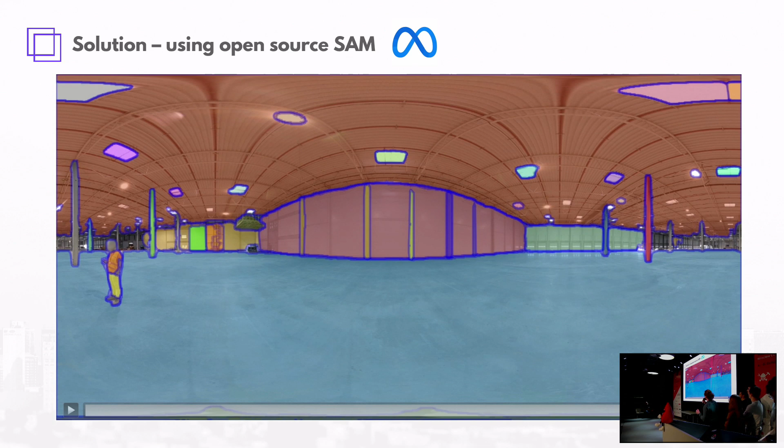So the first thing we found is that there is a web app where you can actually perform segmentation on an image, and we knew that this model would work for our case because we decided to focus on columns, and you can see that they're selected, and each region would then be used as a mask to compare with fake images. But how do we create a virtual 360?

As it is a key component to generate spherical images from the BIM model in the exact same position as the real spherical images, we tried different methods, and some of them didn't work. For example, we tried to load the IFC model into Blender and generate the spherical image there, but that didn't work because the geometry didn't show the way we expected. So we tried other methods.

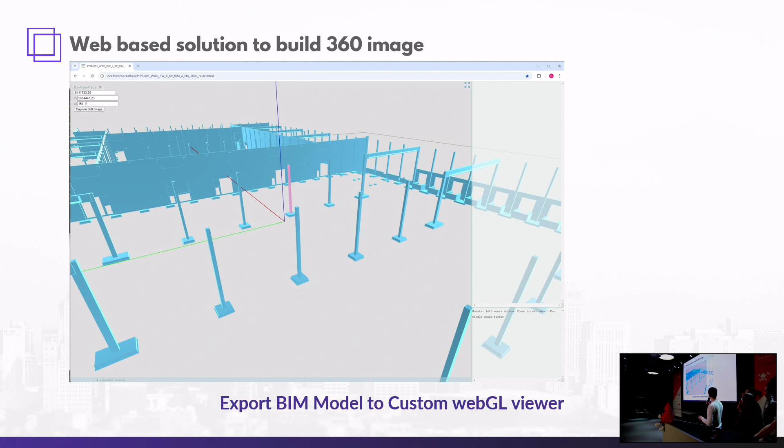We exported the IFC model to a WebGL model, took screenshots there and arranged them in a spherical image. That almost worked, but another method that actually worked was in Unreal. That's you again. Yeah, so that is quite a known workflow.

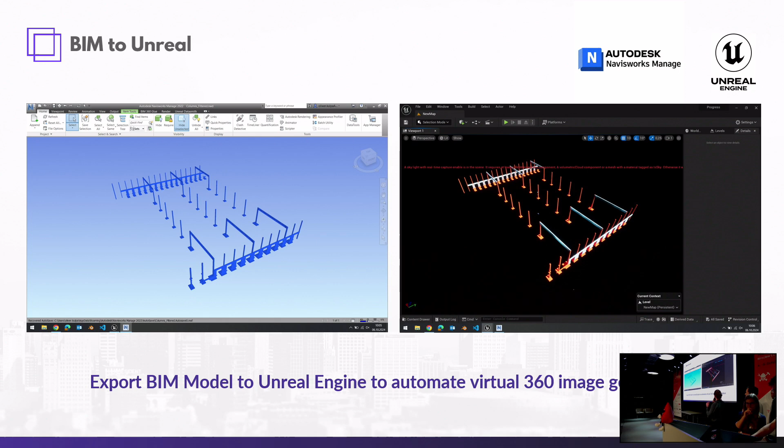We imported the IFC file, filtered, because it was quite big, into Navis, then from Navis we could bring it into Unreal Engine. That's a gaming industry solution, and it's known for automated ways of performing certain tasks. So we wanted to automate virtual 360 image generation based on the real panorama locations on the construction site. The goal was to reconstruct the real 360 image.

The virtual environment has the model data. Every column was then... can I ask for the next one? For every panorama, we focus on elements within a certain radius to minimize the search set. No, let's go back. Then we saved a series of images where every image represents the mask of a certain element, and the name contains the ID.

And when we had this, we tapped a bit more into the coding and got more into the AI models themselves. We compared the two types of masks: from the real images and from the images that were artificially created.

Then we used a Power BI dashboard to communicate what happens in the model, and we used IFC OpenShell to add a parameter to the IFC model that would tell us if the element we were looking for was built already or not.

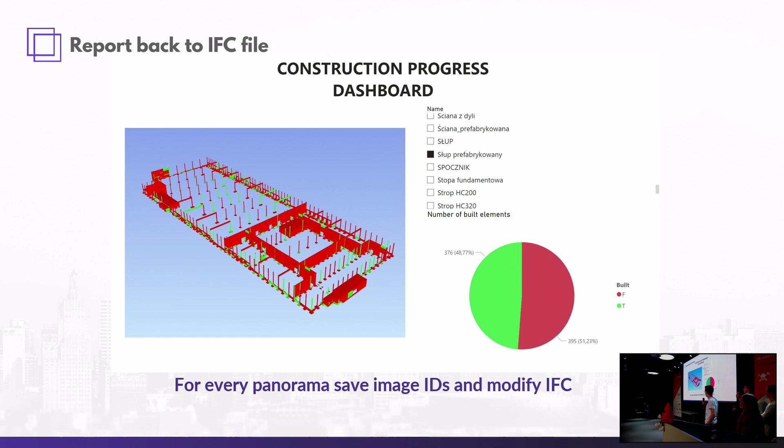So with the use of 360 segmented images, we were able to map those segmented images on a sphere and then check intersections of rays coming from the center of the lens. And therefore, we were able to compare the 3D IFC model with the segmented image.

So the second method is probably the simplest and the easiest, but not the most accurate. We used image classification instead of segmentation. And we only need two things for this, basically: still the 360 image, and the number of items that are within a certain radius of where the image was taken, which is a numerical value, so there is no comparison of masks of images or anything like that. All right?

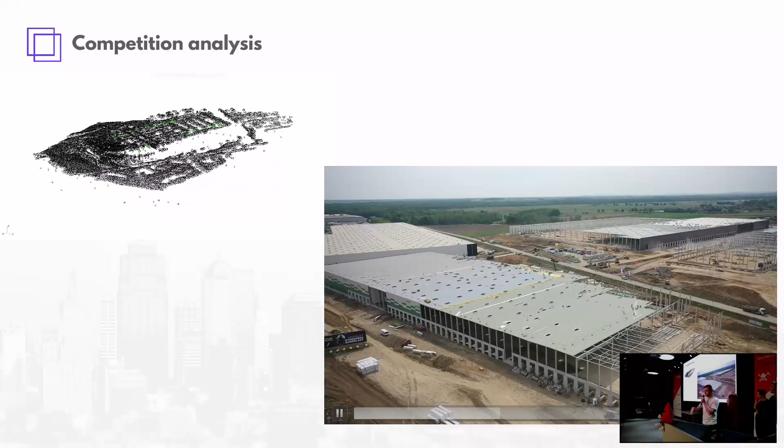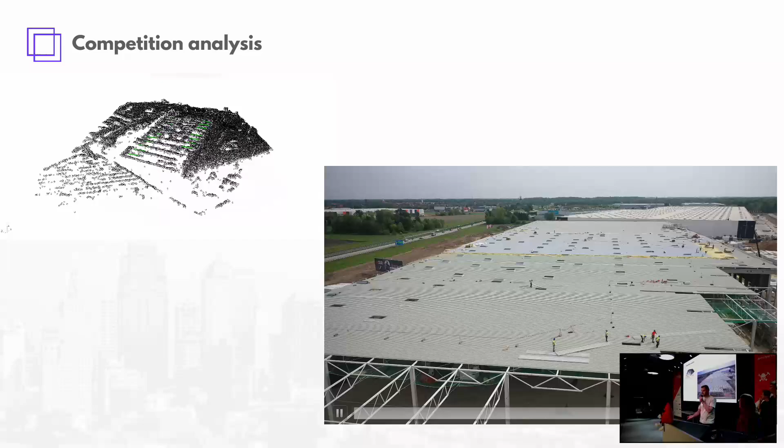But we also decided to check another approach, just to compare the data from the construction site and also from the BIM model in 3D. So we also had the video from a drone, which we could convert into point clouds. Having these point clouds geolocated, we were able to check: is this element from the BIM model, does it have points from the point cloud inside? If it does, it is constructed. If it doesn't, then it isn't. And we gave that information to the IFC model later. But the point cloud wasn't accurate enough, actually.

So we decided, what if we create our own point cloud? It's this location here yesterday, that's my iPhone, and you can see we were able to scan. This technology is evolving so fast right now. With the iPhone, you can solve it much easier. You don't need to compare the images. You can just scan the whole space in much less time. Because with the previous solution, you need some person every time in the same space to do the 360, and then also put it on the model where it was made. There was a lot of additional input. With the point cloud, you can omit all this input and just put the camera on the helmet, connect with your app, and gather this point cloud from the workers even while they're working.

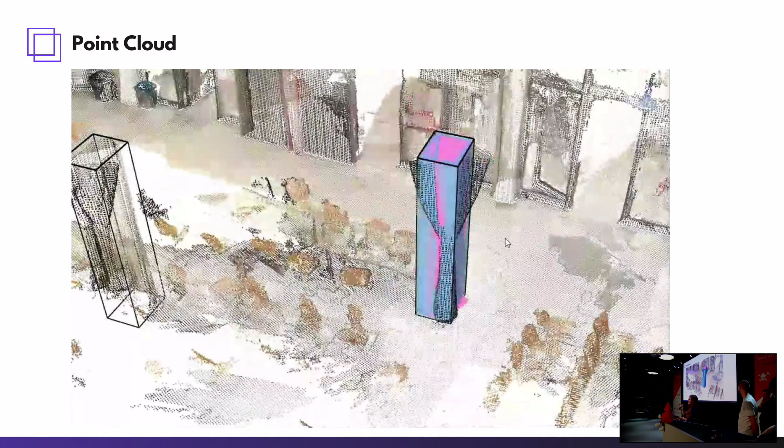So this is something which we obtained from the iPhone. The point cloud is very accurate, and the spacing is also accurate. We can see the pink ones are the elements of the columns which are inside the void of the IFC model, and how we compared them. We didn't check the points inside the volume because it's also time consuming for a big point cloud. We rather checked the XYZ location and how many points of the point cloud we have if we project the point cloud distance onto this column. So if the point cloud in this area has, let's say, 50% of all points, this means there is some element there. I think this is a simpler solution, and it will work not only for columns, it will work for all the other elements.

And we also believe this is a better solution than using 360 images, because this is also how the industry is trying to solve it. This is a big problem, very widespread now in all construction. There are a lot of startups trying to solve exactly this problem with big funding, and they are actually trying it with the 3D point cloud. So we think 360 is maybe not the best way because it still requires a lot of labor.

So this is our team. We had a lot of fun. There was a great team spirit. We spent a long night yesterday, and it was amazing. I was a bit scared coming here, to be honest, and now I'm not. It was really great. So thank you so much.

Okay, so my question is about how you check the collisions between point clouds and 3D models. Was it in Navisworks, or did you use some other solution, and how do you connect the data from those collisions to the IFC model? With the point cloud or with the 3D model?

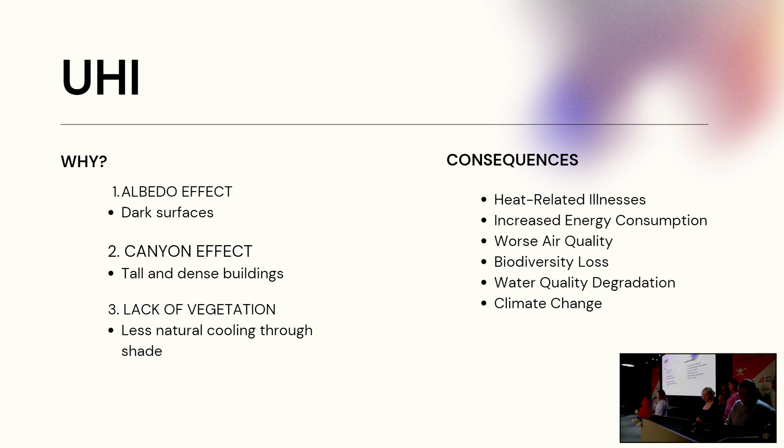So I want to introduce you to the topic. What actually is urban heat island? It is a problem affecting cities. The temperature in the cities is getting hotter and hotter. And there are several different factors causing this problem.

One of them is the albedo effect, connected to the reflectivity of the surface. The second is the canyon effect, connected to tall and dense buildings, making the streets like big canyons. And the third is lack of vegetation — cities have less natural cooling through shadow.

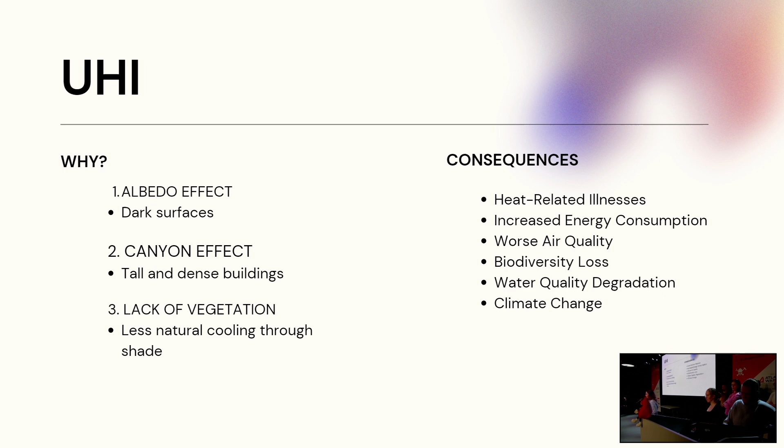On this website, you can see our simple application that will show what are the problems of urban heat island. We expressed the problems we talked about a moment ago, and why it's important, why we should care. But we also included an MVP of a heat map, where citizens could see where this phenomenon is happening the most, and understand how it's influencing their everyday lives.

So the next time you're going through a plaza and it's generally cold in the city, but on this particular plaza you feel like you're on a plate or in a microwave, you can check if this phenomenon corresponds to your feelings. But that's not the only thing we've done, because we also wanted to start solving this problem, or take a small step toward solving it.

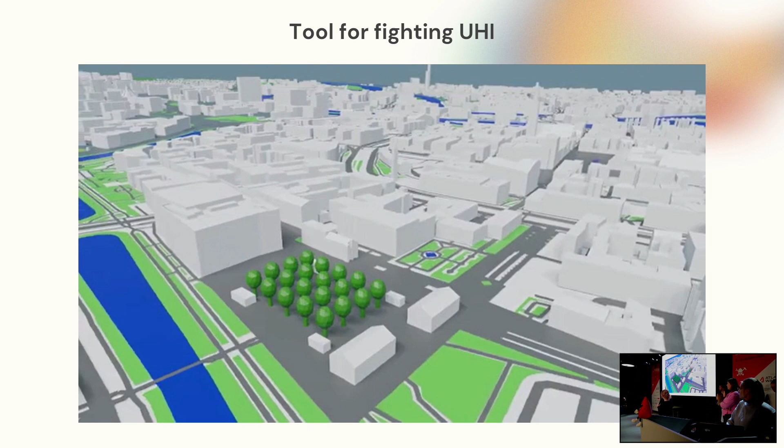So we wanted designers, urbanists and authorities to know how their designs and their actions will influence the urban heat island. So we created a tool, or rather an MVP of a tool, where you could input buildings or trees, a park, to check how this would influence the urban heat island in the future.

Right now, the algorithm is quite simple. It takes a point, a coordinate on the map, checks what temperature there is right now, how it's shadowed, and so on. In this way, it could output a new map to show the effects of the design.

Okay, and I'm honored to present our technical solution. So what have we implemented? We have the client side, which is you, and we make the HTTP request to the front presentation layer. This was written by us in JavaScript.

After that, we have the API and the backend business and data layer. In the business layer, we're transforming and manipulating the data. In the backend layer, we are able to access the databases, which we created for this demo presentation, this MVP, on MySQL, and also the third-party services, which also communicate via HTTP requests.

And there is the response, and here is what you have on your phone. This is what we have implemented, but we also had a second plan to implement.

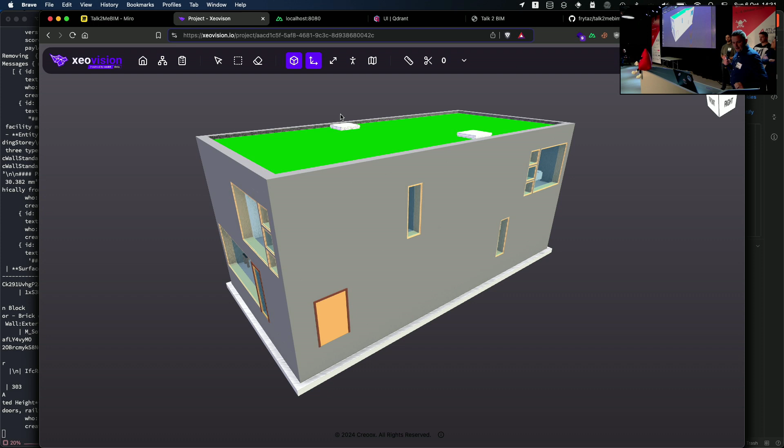Okay, so what we do is we upload the model to the XeoVision simply to have the storage space for the model, and we copy the URL for the project. We paste it inside. This is like a pre-loaded model, but we can change it to anyone. And then the models are being read through XeoVision API.

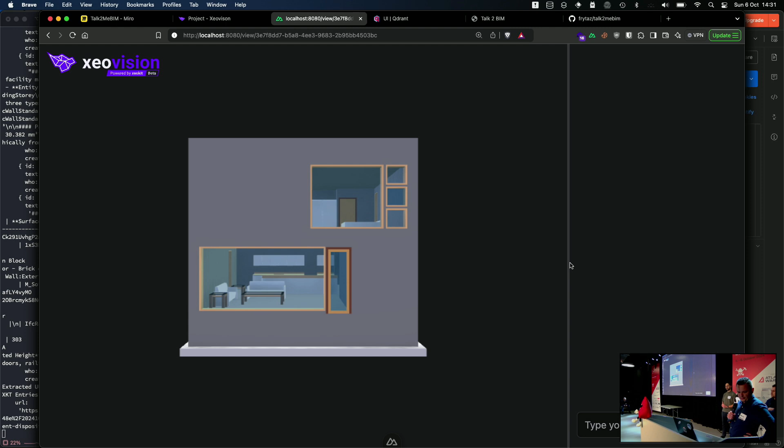And now we have this 3D model, 3D IFC model on the scene here using xeokit. And here we can type our prompts.

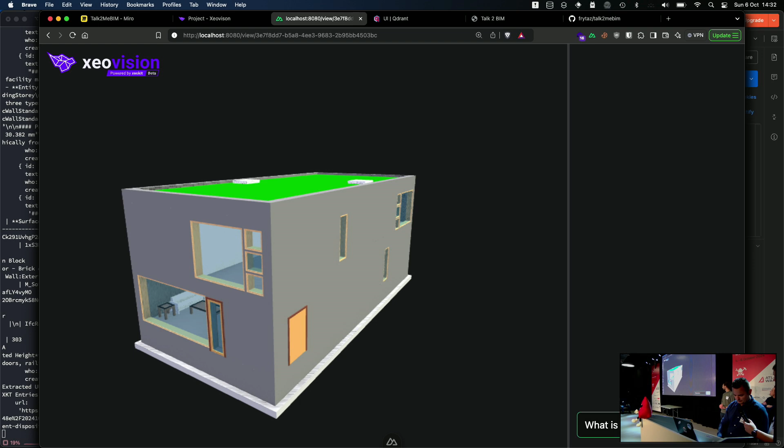So what is the biggest wall? Or maybe I will make it bigger. Oh no, it won't work like it. Oh, maybe. Here. Yeah. So yeah, and here we have the response.

And what we do is, on the first attempt, we generate the vector database. We fill out the vector database with all of the information from the IFC model, and then we also calculate other keys in the object, like surface and metrics of the elements. Then we can ask furthermore. So we could ask what is the weight of this wall?

Okay, so the AI model responded that the data provided does not include the specific information about the weight of the walls, but we can add mass. We can add information about, what was it? That the density of concrete is 2.4 gram per cubic centimeter.

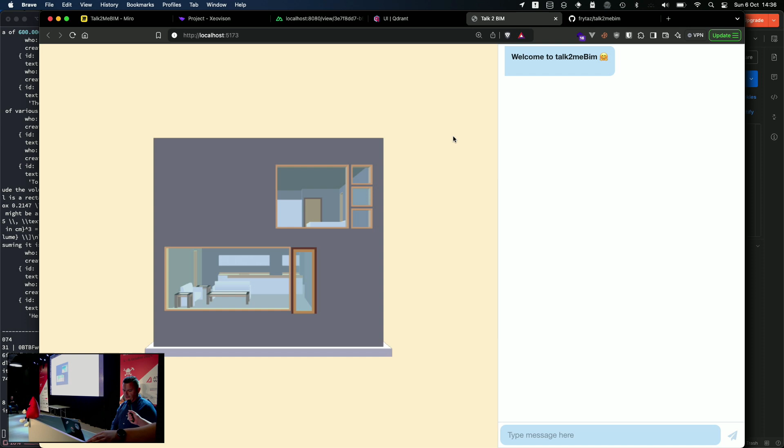So we split it in the front end and back end, and we have a working API to integrate other tools. And yep, so this is the first app. And we also have a second app, which we didn't have time to merge together. So with the second app, you load the same model. Here's an example, and here we didn't merge it yet.

So here you select something, and then you can let the app integrate with the viewers. So we can type to isolate the object. So it removes everything, but leaves just this part of the model. And let's inspect the most relevant object properties.

So here are the properties we get from the model itself, and some calculated values like estimated width, depth, height, and we can ask any questions about this data. So the source is publicly available on the GitHub, and yeah, that's it.

So I have a question about prompting. Yep. So is it like you can ask whatever you want, or you had to provide a kind of limited number of prompts? What do you mean by number of prompts? Like you ask, for example, what is the size of this wall? Can I ask, for example, whatever I want? Like, what is the density of this wall? Or... Yeah. Okay, so this is actually

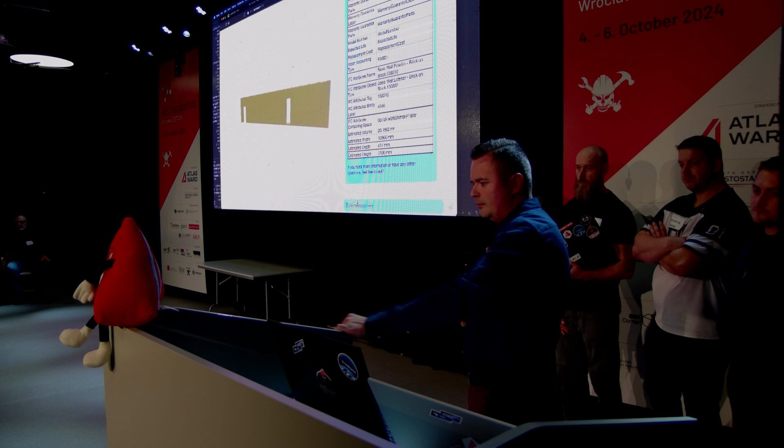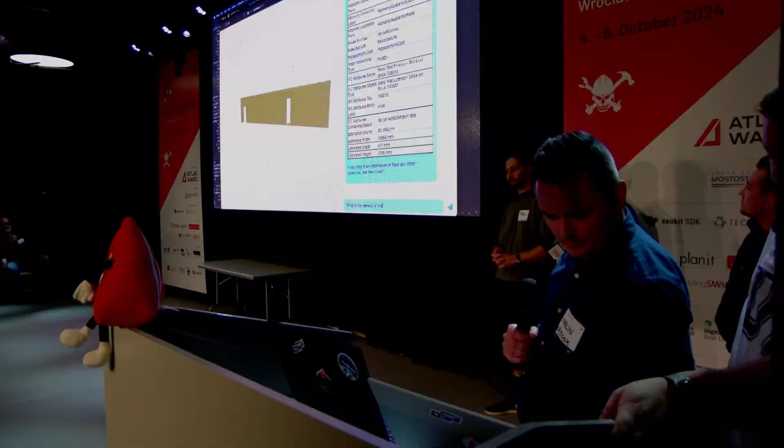intelligent. The density of this. So yeah, it said that the brick block typically has a density range, for example, density of the brick can vary from about 1,600 to 2,400 kilograms per cubic meter. So we could,

yeah, we need to provide the mass of the material. So like in the first app, we needed to add the material. But we could set all of the needed information up front in the system for the AI to know. So some agent could fill it out while adding the model to the app. Yeah.

Congratulations. One thing I'm wondering is that it would be super useful to use this sort of thing for comparing models. And that could be a next step, right? To load two models, two versions of the same model, and ask it for differences between these models. Would that be possible? Yeah. Well, in future improved versions, why not? Right now it is working only with the model which is loaded here.

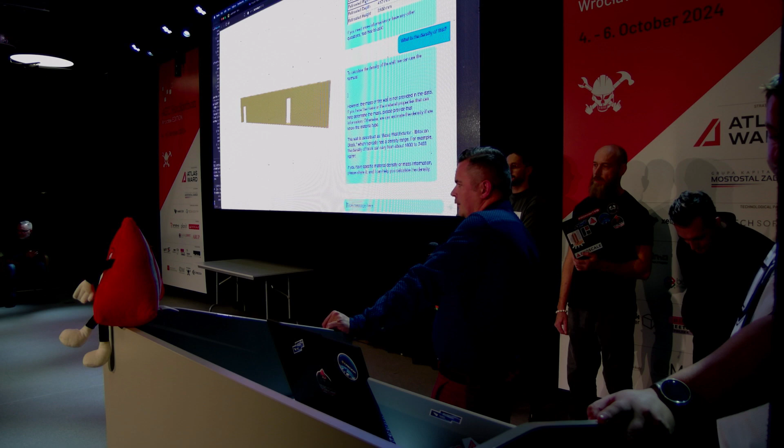But with the xeokit approach, we can load many models on the scene, and it could work like that. Okay, so let's imagine that we have two versions of the same model, but in between someone deleted a wall and created a new wall, so the ID changes, but basically it is the same wall with just a different opening. Would AI understand that it's the same element, or does it map to IDs, or to location? We generate the embeddings and we map them to the ID of this element.

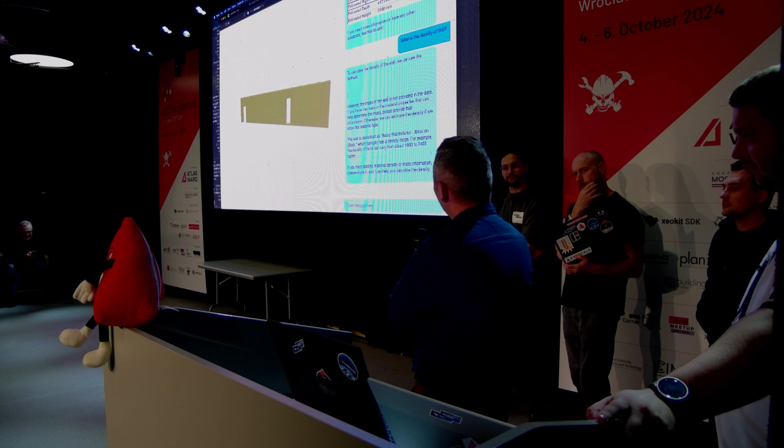So do you think there could be a workaround? We didn't think about that certain problem, but with more time, why not? I think it could be possible. Thank you. Maybe somehow you could use XYZ coordinates to compare, for example, the wall.

But my question is, did you manage to create interaction between the chat and 3D models? For example, if you look for the biggest wall, you can display this in the first app. I didn't get it. Actions, how we use the command and a mediator that fires different actions, using strings to identify the actions. Oh yeah, so with this second app, we can predefine the actions. So here is the example of

simply removing, to isolate the object from the model. So we could add any number of more actions and simply let the AI know how to use the xeokit SDK to view, X-ray, hide, or change the color.

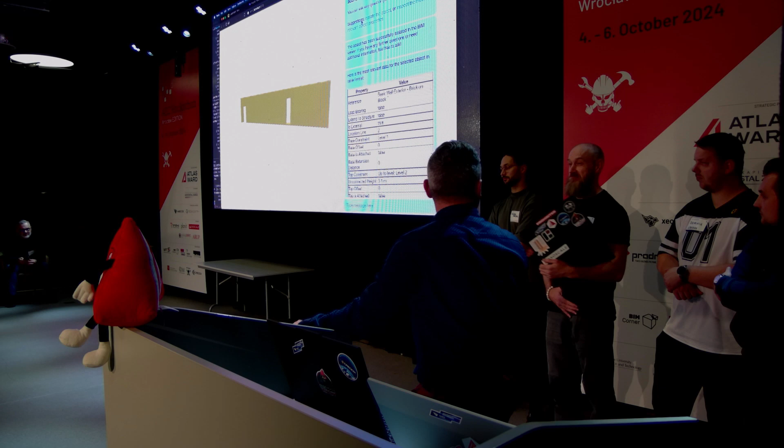You are part of this category, for humans, yeah? Done for humans. In your opinion, who should be the most interested in using this tool? Sorry, could you repeat? Who? What stakeholders of the construction process can gain a lot from this tool? Crane driver. Oh yeah, like a crane driver.

So maybe non-technical users could open the model and simply ask in plain English or Polish. You can ask the question in whichever language you like, not only in English.

Okay, so thank you. This is all questions from us. Very good presentation. Thank you. Let's have a picture in the middle somewhere here. Thank you very much. Please stand here in the middle. Closer to the edge. Come on. Thank you.

Next presentation. I have a small cheat here, but I'm not sure if the name is proper. Placeholder name? Yes. I thought that it is a placeholder, but it is the name. Great. Please welcome. Sure. Should I keep the microphone? Who will present?

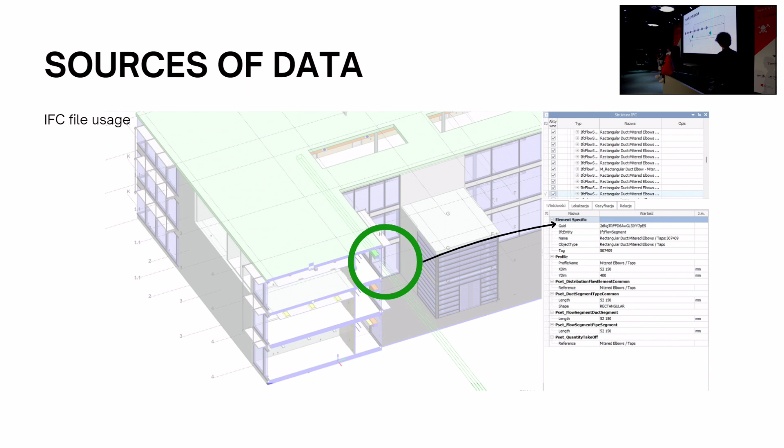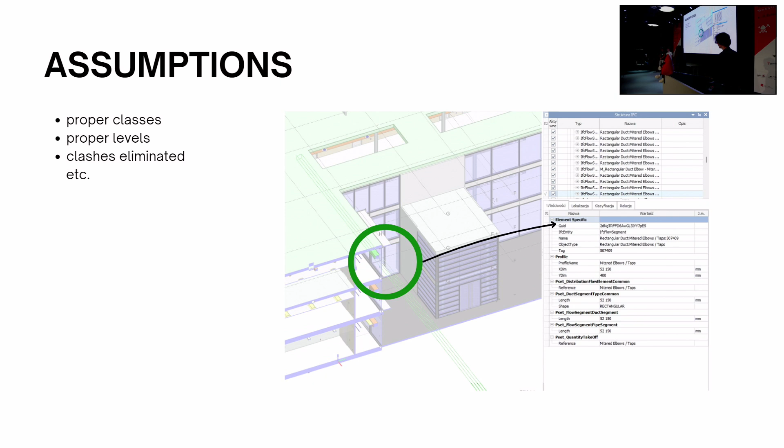What we try to do, and we are going to present it soon, is how to simplify the process and to enable this person who just knows a part of the project to extract information directly from the model. So the source of data should be the IFC file. And for this specific project, we make assumptions that we have all the information inside. So this is a good quality of information, nothing is missing, it is properly classified and so on. And the solution will be presented by the colleague.

So, hello everyone. I would say that the main problem is that currently the source of data is from the designers. And yeah, sometimes we know what are the needs of the construction workers, but we are mainly assuming that.

And our main goal was just to think a little more about the workers, about their needs, and empower them, give them some superpowers, some new BIM viewer tooling, which will enhance their possibilities to solve their daily problems without picking up a phone and calling the design office that something is missing on the drawing. Because they should be able to get the correct data directly from the IFC without this pre-step like we usually are doing currently.

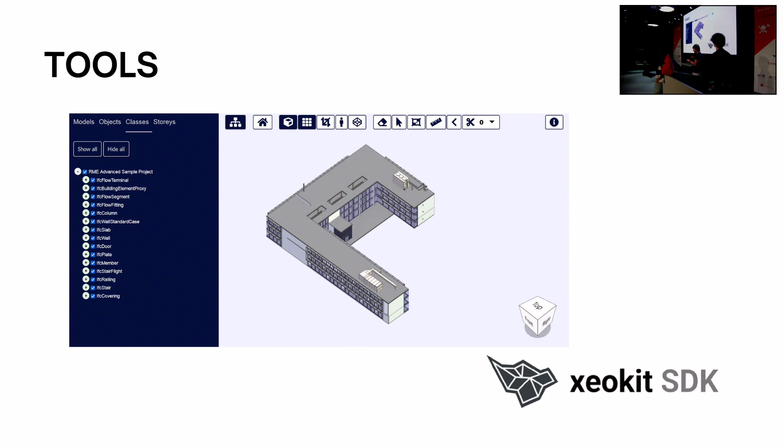So we tried, and we are very happy about the xeokit SDK. It was our first time when we were exposed to the technology. It's a very, very blazing fast viewer for web geometry files, which is providing us the possibility to provide the information on the construction site almost live.

So let's see what are the main problems about different scopes, different contexts of the construction site. We don't know exactly what will be the order of installation. We don't know exactly what extra data, what metadata is needed at the different sites. So we want to postpone the decision about the needed data as long as possible, to provide it just in time on the construction site, without all of those quantity takeoffs, all of those drawings created much before. It should be generated on the fly when it is needed.

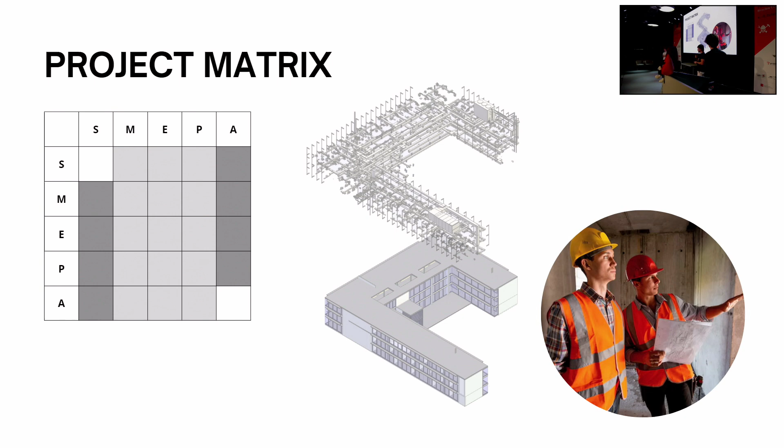Because, as you can see on that project matrix, there are numerous different factors on the construction site. So providing all of the data upfront will always lead to a problem with outdated drawings, outdated tables.

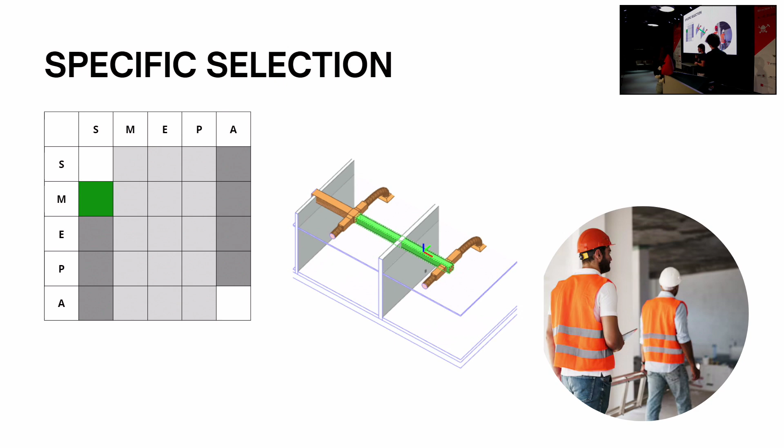So usually construction workers have very specific tasks. They need to install some pipe. They need to provide some new equipment on the construction. So they don't think about the whole construction as us designers usually do. Their scope is much smaller. So let's provide them the tool which will be able to find the answer for their day-to-day problems without overhead about the whole model.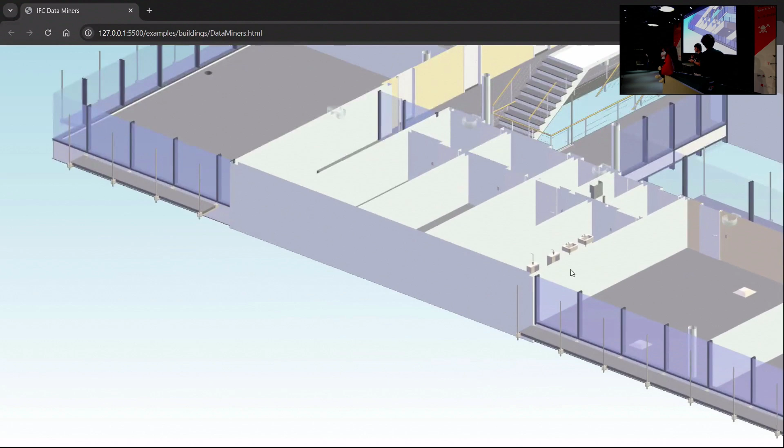And if you think about it, almost all of the data is or can be currently placed in the IFC models. But of course, sometimes it is missing because we always need to find time for the normal duties like creating the standard bill of materials. So the main goal is to emphasize the role of the IFC in the post-process.

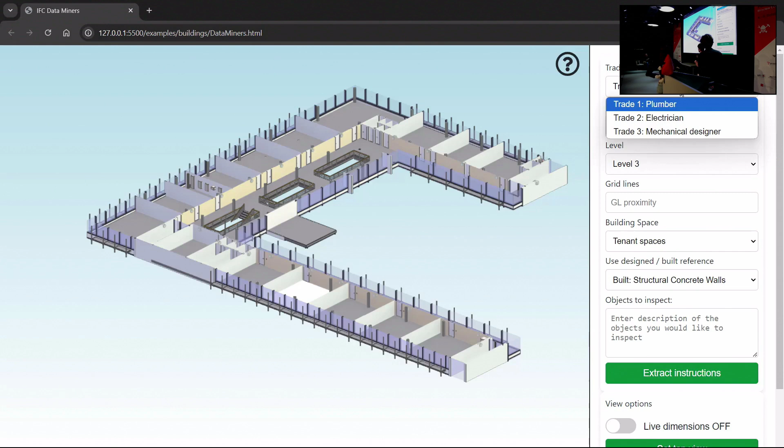And as you can see, based on the xeokit SDK, we can generate automatic drawings on the construction site exactly for the need of a specific worker. We have not checked, but we think that it could also be done on a tablet, on iPads. So, you know, the construction worker can just click on something that is of interest for his current duty, get all of the needed quantity takeoffs, get the dimensions generated particularly for that need.

This is the biggest change, because when we are creating the drawing during the design, we don't know exactly who and when will consume it. So we are just assuming that, okay, probably this will be needed, this will be needed, this will be needed. But the whole purpose is to shift the process, to not do a lot of work upfront, but provide it just in time.

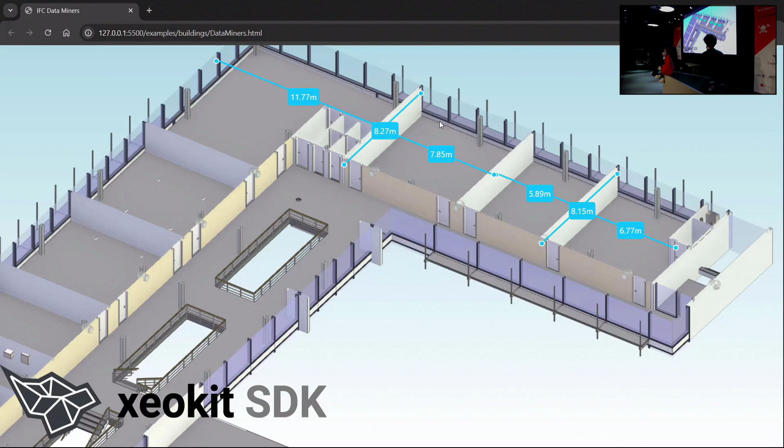And yeah, we hope that at the end, the final solution will make not only construction workers happier, but also the designers. Because we usually don't like that phase of the project, where every hard, logical thing is already established. We just need to, you know, provide the same data in a little different format, which we all think is outdated. But the needs of the construction site are very strict, very concrete. So yeah, let's just think about better tooling which will help them to extract the data from our IFC models.

And as you can imagine, it should not only provide accurate information, because the construction will not be based on something which was created a few months before, but it will be provided on the currently updated IFC model. And we put, as an industry, a lot of emphasis on providing the quality of IFC, on making them available for almost everyone. So let's think also about the construction site and about their needs.

And of course, based on the data gathered in the IFC, we could think of other solutions, like we are usually doing now in the BIM authoring software. I really liked the presentation from Agnieszka and Kamil about positioning of marks for those wind turbine foundations. And of course, the question is why the designer should spend time on that particular part. His work is already done. He calculated, he provided the structural estimation, and that's all. Why are we thinking about the representation?

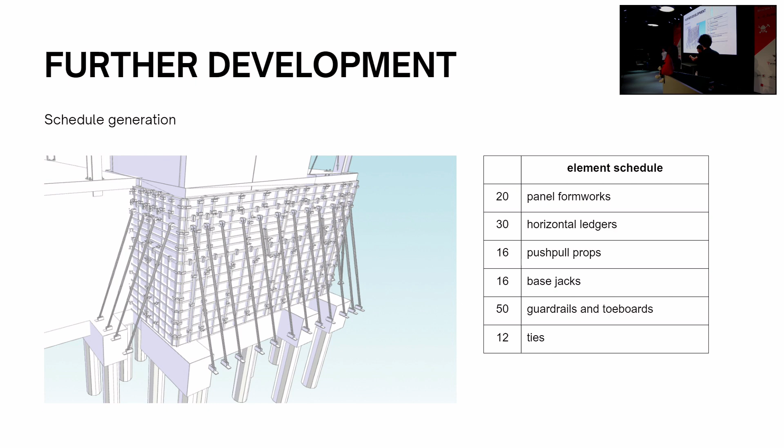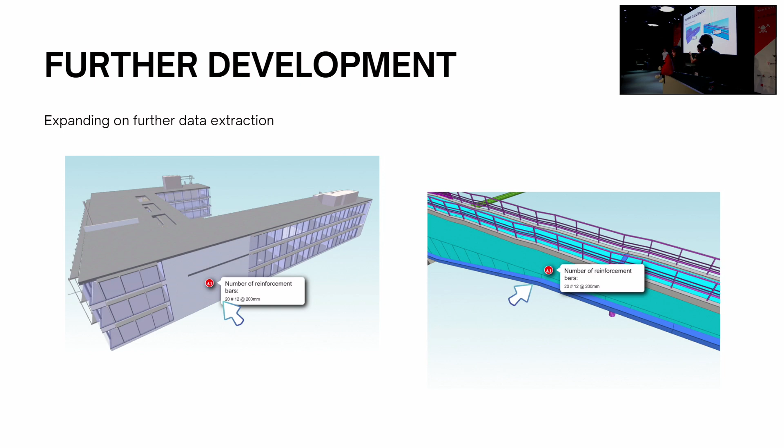We are doing that because the rest of the process doesn't have the proper tool to do it themselves. So yeah, why not take quantity takeoffs based on the IFC? I know it's not very innovative. It's currently in some software, but let's try to put those workers and their needs in the center of that kind of development. And there are also rebars. So let's provide the necessary details about the rebars for our bridges, for our constructions, based on the IFC. Let's provide the bending list, let's provide the drawings. Why not? That information is already there.

And maybe it could also be used with what you have shown, with that very nice Telegram bot, for sending BCFs based on the real struggles on the construction site. The worker is taking the automatic measurement based on the IFC. He tries to do the same in real life, and hey, whoa, something is not working. So let's try to use your chatbot to automatically generate a BCF, and we will have that.

Yeah, and when we were developing the tool, I remembered my journey of planning the kitchen. You always need to first think about some stuff and then take dimensions. So taking typical building dimensions is not only applicable to our industry, but to almost everyone who is dealing with the normal physical world.

And we are pretty sure that you also have a lot of different ideas how it could evolve, because the need is real. We are struggling with the current flow. We would like to only work in Grasshopper, in Dynamo, to only think about parametric design. But unfortunately, in the scope of our duties, there are also those ugly drawings and quantity takeoffs. So let's think how the next generation of BIM tools could incorporate the needs of the construction site. And yeah, thank you very much.

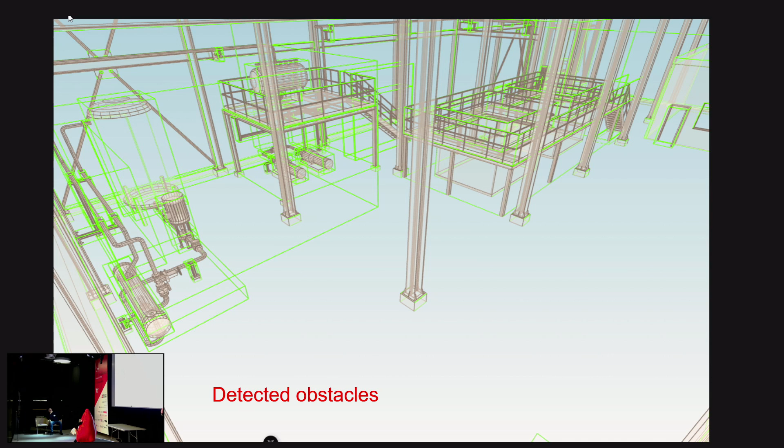Possibilities for complex meshes, as well as different types, properties, and we also could consider every element as penetrable, not only 0 and 1s, but almost like a percentage. And of course, yeah, that's what I say. And then we could also extract from the IFC model voxel data with all the possible weights. Yeah, and here are examples of the detected obstacles in xeokit.

We also tried a different approach using Rhino Grasshopper. We have a short video where we see the obstacle, defining obstacles, the restrained possible pipe routes. The first step, we're creating mesh structures and converting them into lines, potential pipe routes, then converting Rhino Grasshopper geometry into graphs. We're using the Mega Arachne plugin developed by Wojciech Radaczyński. Then we specify the initial and the final point of the path and find the shortest path using the A-star algorithm. And that's all.

I was also focusing mainly on the algorithm. During the research for the subject, I found this paper, weighted octree-based 3D indoor path finding for multiple locomotion types. It was quite interesting because we as humans and also pipes, when we are moving around the building, we have our limitations, we have our preferences, and this paper was trying to solve it. What I did is I implemented this paper using Python. I have set up a Python model with a server that would integrate with what my colleagues have done.

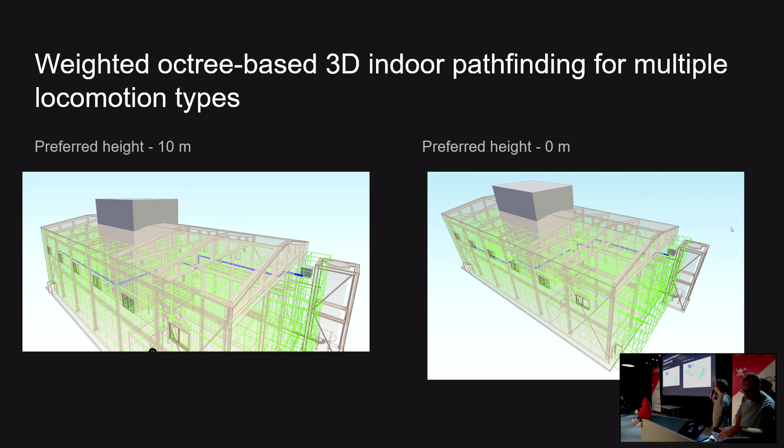And what this algorithm does is not only finding the shortest path, but it's also trying to find a preferenced path. So for example, here we have found 2 paths, but on one, the preference height is 10 meters. And on the second, I have lowered the preference for the path. And as you can see, we have different results. And probably this algorithm could be developed, and we could find some other points of interest or other objects that we could snap to. And I think this is the way for the algorithm to go.

We also focus on user experience quite much, because we didn't only work on several problems, but as my colleague said at the beginning, we wanted to cover the whole workflow from importing of the IFC to assisting the designer in piping design process.

Here we have a small visualization of how the points can be chosen, between which we will look for the path. As we assumed at the beginning, pathfinding algorithms are nothing very new. We have some sophisticated algorithms, but that's not everything we need, because we can start the algorithm, the magic happens, and what can we do with the output if it doesn't meet our limitations, which are many in the industry.

So actually what we created is a tool which allows us to assist the designer in this process, and between the points, in this simple beginning workflow, the shortest path is found.

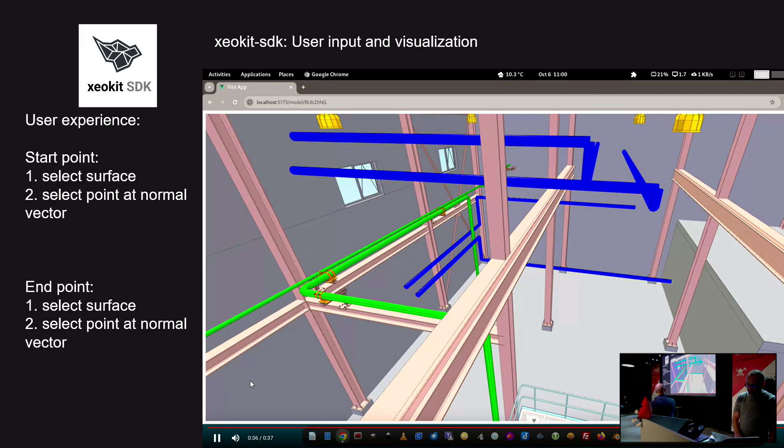Here we have the example of the easiest one. It's simply X, Y, Z leading of the path.

We also used our outputs to show that we can do much more, so not only to use xeokit, but to use any software we need.

Here, for example, we used our output path to show it in Aveva software, where some industry companies have interest simply to have their projects. So generally we can think about our software as a tool for any program, useful for any plugin with this flexible architecture, and this is what we wanted to achieve.

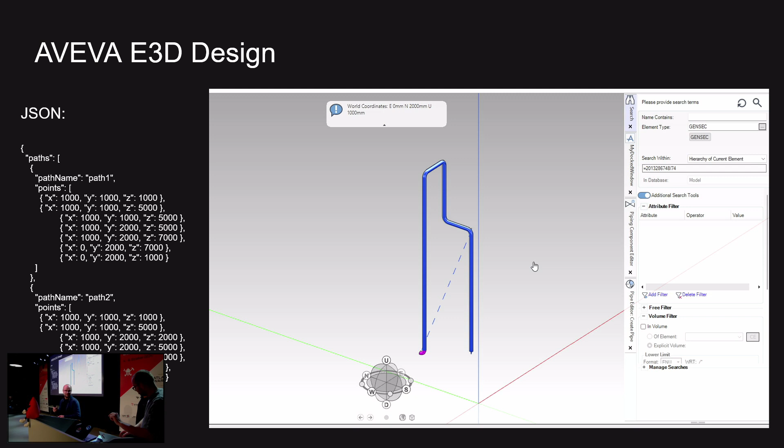Congrats, great presentation. So you have been minimizing the total length of the pipeline. Have you been thinking about other factors, such as the ease of installation, or what the pipes would be hanging from, etc.? Yes, of course.

At the beginning, we collected a list of different limitations that we can meet, and we decided in this short time simply to focus on the angle of the starting pipe, because it cannot go parallel to the wall, for example, even if it's in the allowable area.

Another constraint was, like the colleague showed, that we want to prefer some height, so for example, we want to lead the pipe just next to some supports where we can fix the piping.